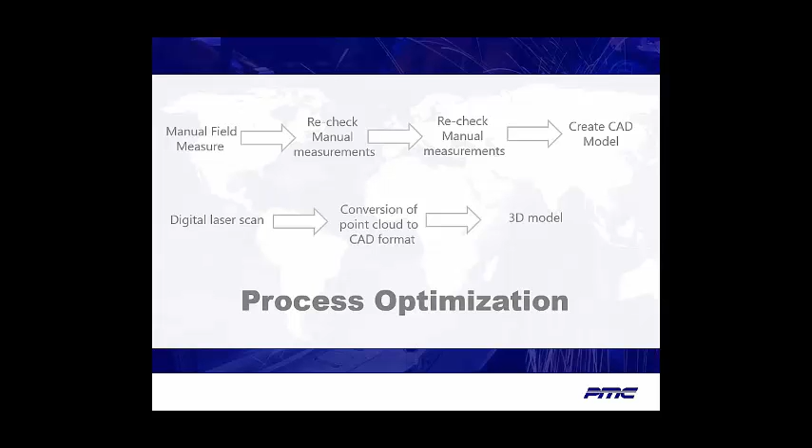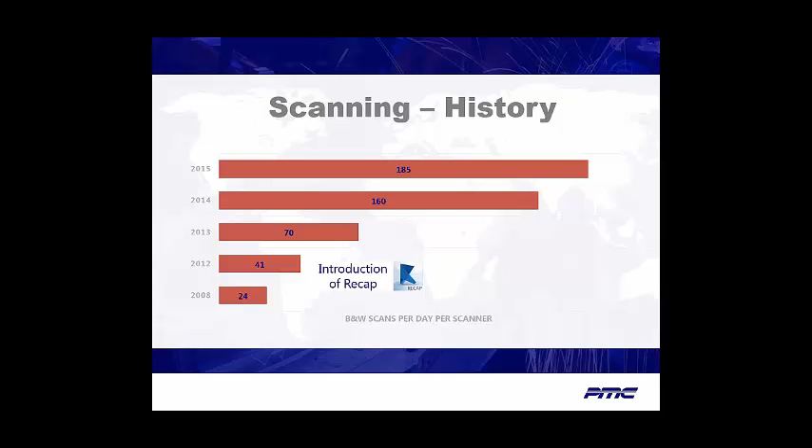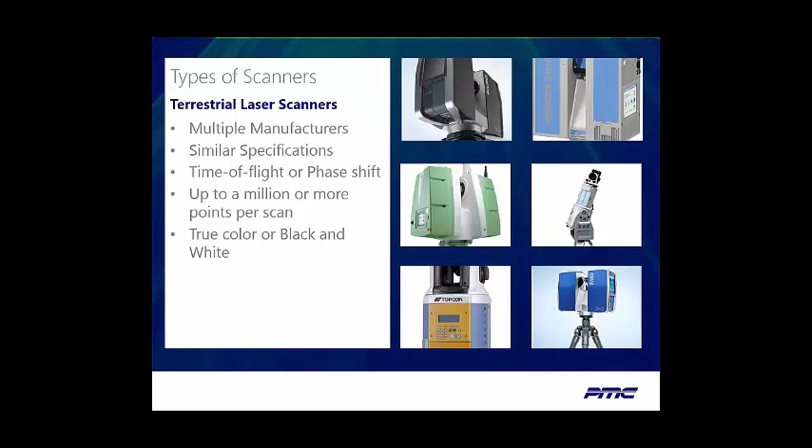Let's examine two common types of scanning used in architecture and construction projects. Terrestrial scanning is used to capture building size and spaces, both interior and exterior, anywhere from thousands of square feet to millions.

Part scanning equipment is required when a high level of detail information is required, usually for reverse engineering of specialty details. PMC has successfully integrated both part scanning and terrestrial scanning for a true vision of facilities where the capture of intricate details, such as tooling or architectural design elements, needs to be included with the facility as-built model.

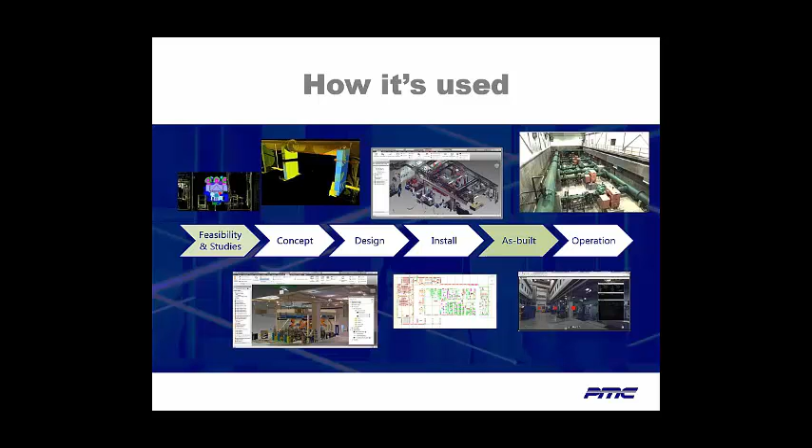Today, terrestrial scanning is used in all phases of project development, whether it's fast and accurate feasibility studies or ongoing facility maintenance and operations. The challenge is identifying at what stage of the process scanning can yield the highest return for you. PMC can help.

The success of a scanning project is dependent on meticulous project planning. The scope of the project is determined by the level of detail and specific areas to be captured. Ideally, scanning should take place when there is little or no activity in the facility.

This might require off-shift or weekend, overnight scheduling, and access to the facility must be coordinated. A fixed project timeline and costs are agreed to before any work begins.

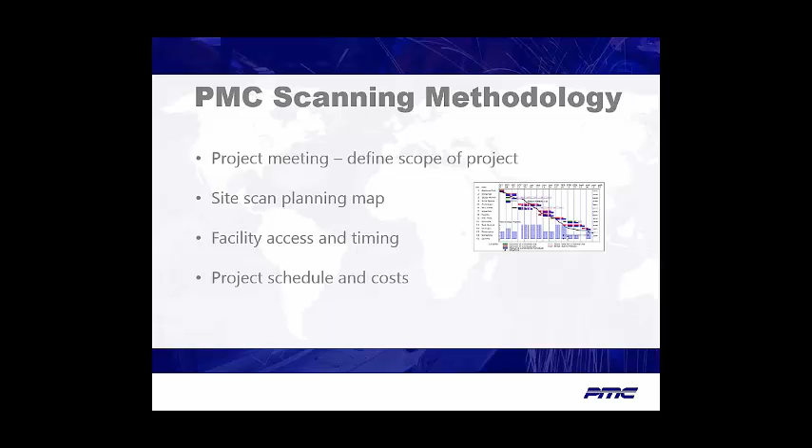Because of PMC's vast experience in scanning projects for over 15 years, we know the questions to ask from an AEC perspective. The details might include existing structural issues and if there are any safety considerations in accessing the work areas. Also, what will the client be modeling?

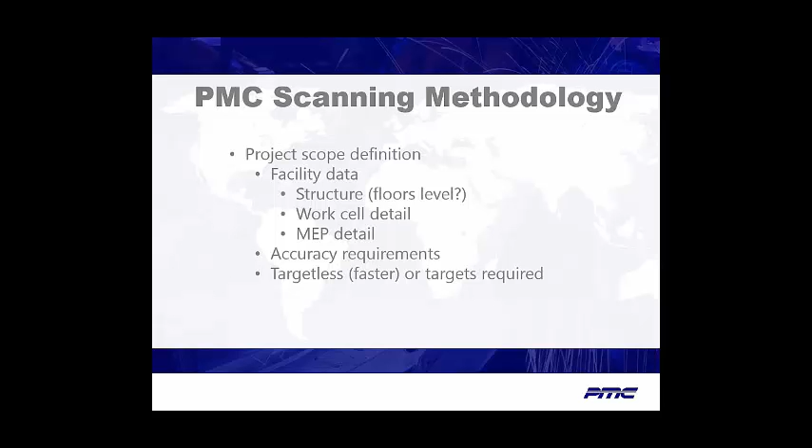For example, will there be a need to take time to capture all MEP detail, or are they only interested in the architectural floor plan? If the equipment and MEP will be removed during demolition, there's no need for the added scanning time and associated costs. This is the typical workflow for terrestrial scanning.

There are always various options based upon the desired outcomes. The basic process is creating a detailed map of scan locations, then field scanning according to that plan, processing of the scans to create a point cloud, and then hand off to the design team.

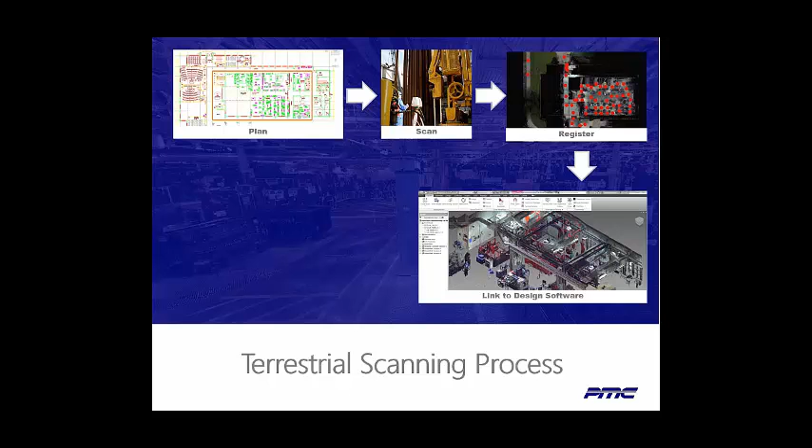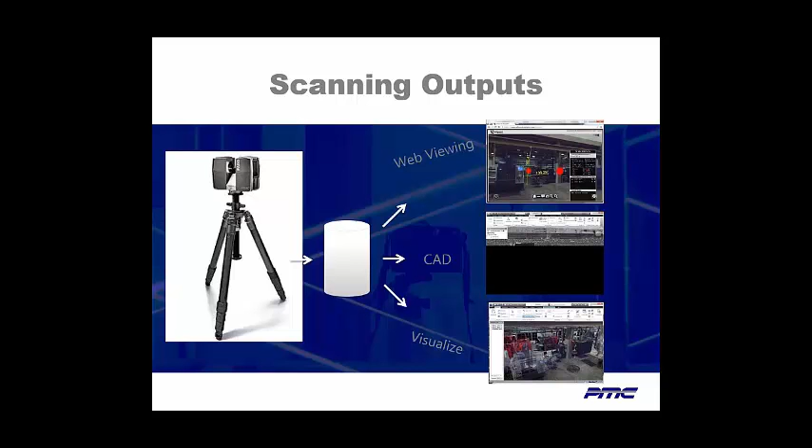Once the point cloud has been created, the data is now available in a number of outputs. Using tools such as Navisworks, the data can be incorporated into CAD software, viewed in the field on tablets, or used to visualize new design elements.

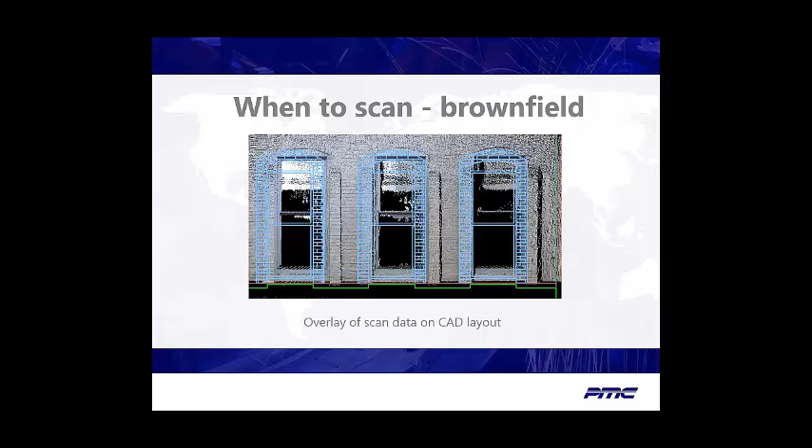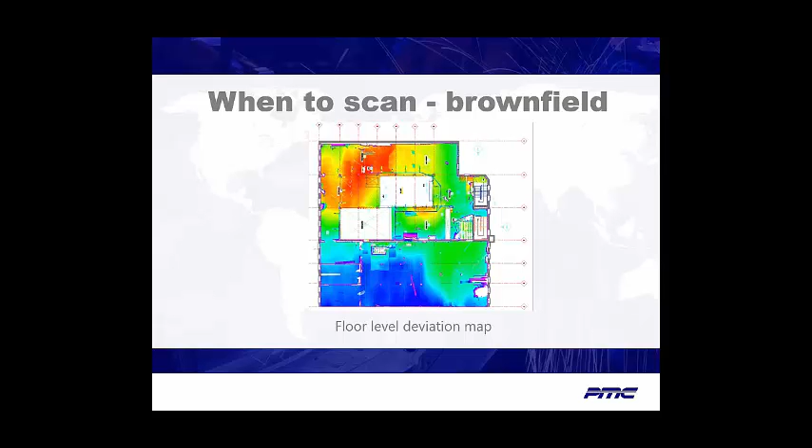Point cloud data can also be used as a design tool. This allows visualization of proposed changes directly on the point cloud data without modeling. Multiple design iterations can be evaluated quickly and economically.

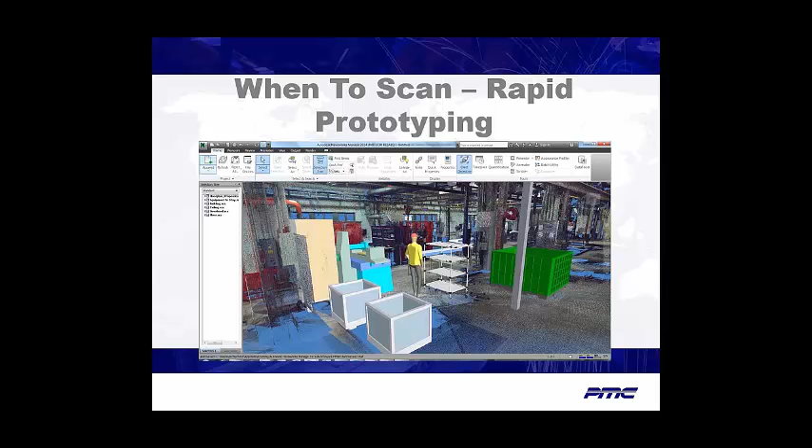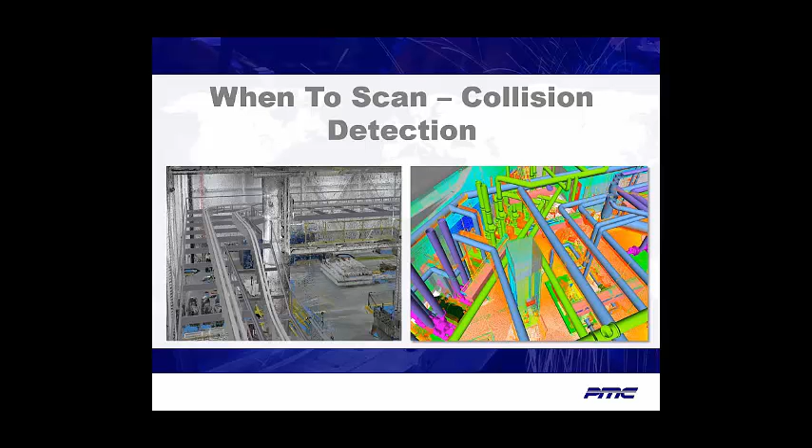Collision detection has always been an important use of point cloud data. Proposed designs can be overlaid on the point cloud and interferences are quickly identified. These clashes are not readily detected in 2 dimensions. This example is from a project PMC completed 15 years ago. The gray background is the scan, and the piping was the proposed configuration.

It is also possible to use the point cloud to create accurate demo drawings. Using CAD software, instructions for the demolition can be overlaid directly on the point cloud. This avoids time and expense required for creating demo documents.

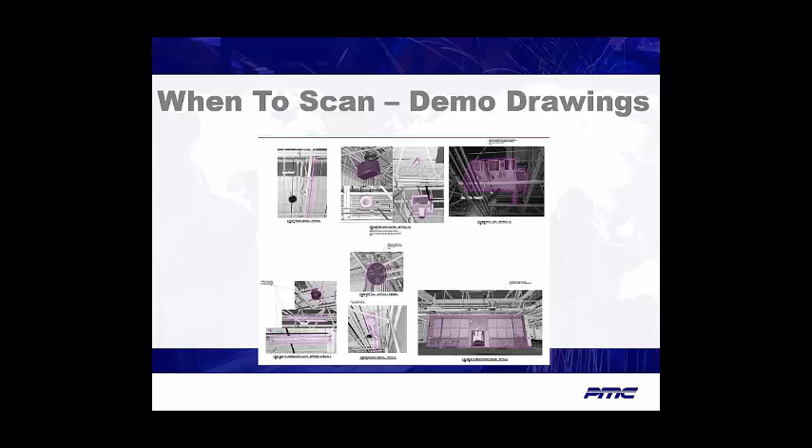For a build to the model or IPD structured project, validation of as-built conditions can be performed during construction. Before the floors are poured or the walls are enclosed, a scan can be completed, data overlaid on the model, and reviewed during a project review meeting. With proper planning, this can be done in the same day.

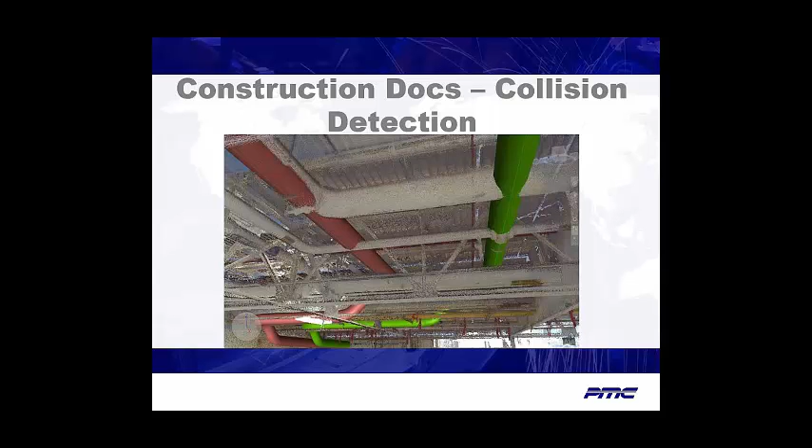For remote job sites, the review meeting can be held online, eliminating the need for everyone to travel. Additionally, the data files can be posted for additional reviews. Everyone will be working with the same data, and multiple trips to the job site can be eliminated.

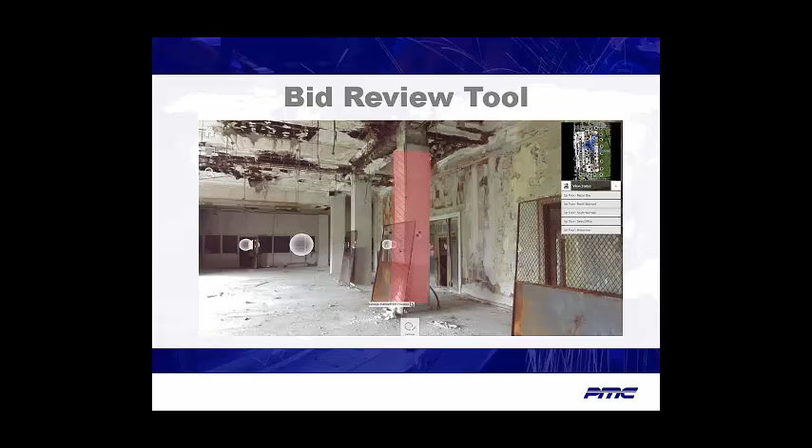PMC also has extensive capabilities in modeling, from conversions of existing 2D to 3D or creation of 3D models from scanned data. Our onshore-offshore delivery model using our wholly owned subsidiary in India can greatly reduce project costs.

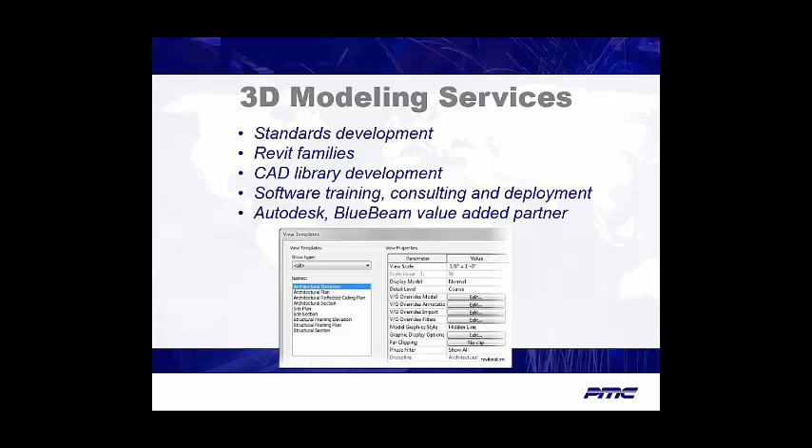Here is a case study that focuses on a project we completed on a building that was over 100 years old and no existing as-built drawings were available, and the field measurements were not accurate.

Architecture is dependent on photos of existing elements, but also requires relationships between elements. Photos can show existing conditions, but cannot determine exact relationships between the elements. During the scanning process, the digital scan is taken, and in the same position, an associated photo is taken to provide the ability to contrast and compare.

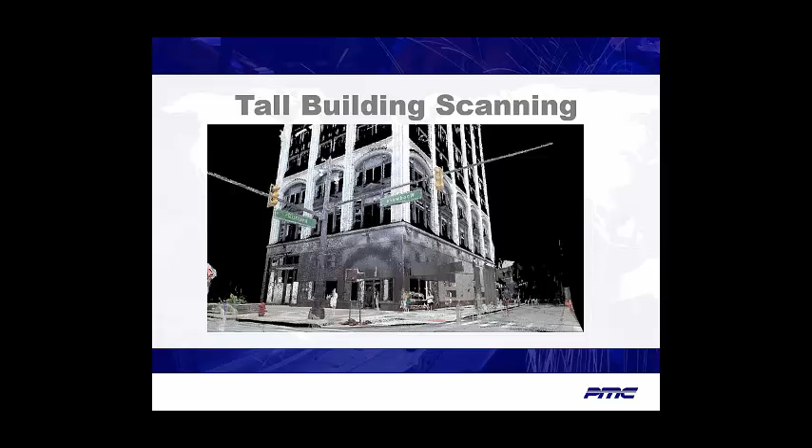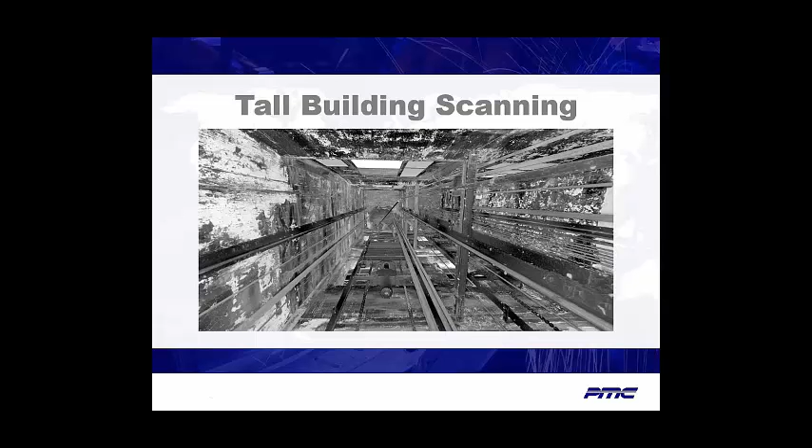Black and white scans can be done in these conditions. Note the conduits along the sides of the shaft. None of this was known by the project team, although the structural engineers needed to know the viability of the shaft.

Because the building had been abandoned, the access to roof areas was limited for safety reasons. Using a boom, we were able to capture the data without having to physically be on the roof.

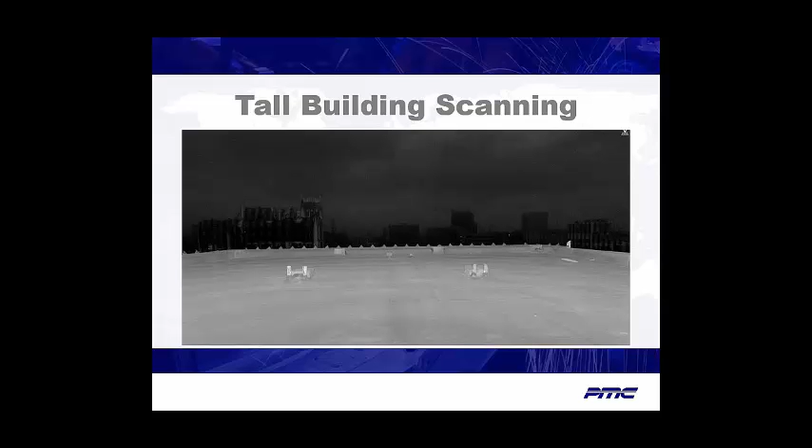Now let's examine some recent projects to give you an idea of timing and costs. The first is a manufacturing plant where the engineers had designed a new piping system in 2D, and the owner had some concerns about clearances and possible clashes with existing infrastructure.

We were able to quickly scan the scope area, convert 2D documents to a 3D model, and perform collision analysis all within a few days. This allowed us to efficiently identify several problem areas, allowing for adjustments to be made prior to construction, saving the owner considerable time and expense.

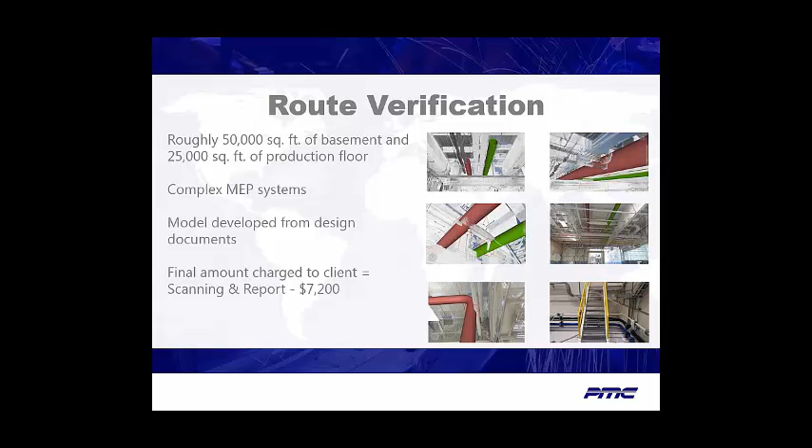PMC has a long history of scanning very large facilities and regularly performs projects that exceed 1 million square feet. These projects require a much higher level of planning and coordination, but can be equally successful to the smaller projects.

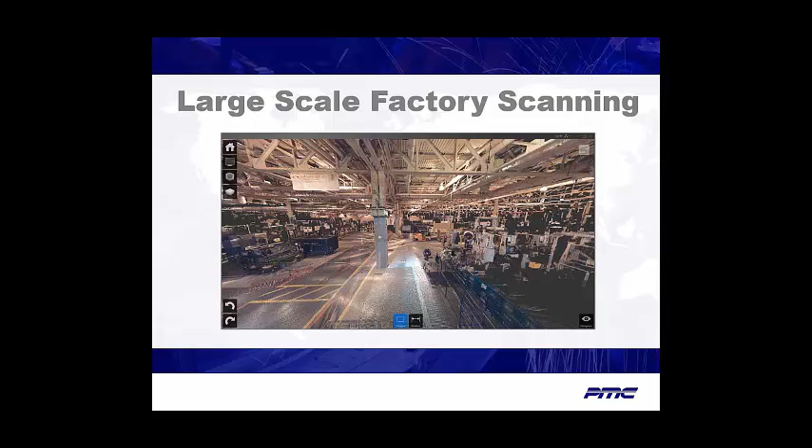In this project, we scanned over 1 million square feet in the week before the Christmas holiday, running multiple teams of scanners 24 hours per day. This allowed us to complete the field work during the plant shutdown.

This project is part of our work with the large manufacturing client to convert all of the factories to smart factories. The modeling portion of the project required a minimum of 16 designers for 10 weeks. With our global operations, we were able to work 24/7.

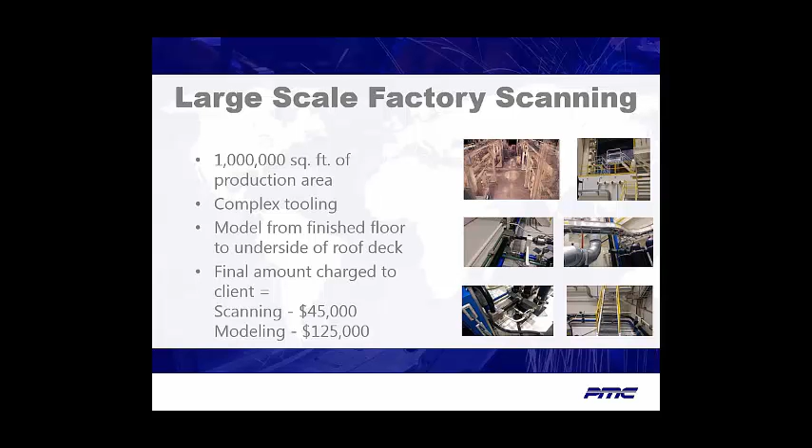With our breadth and depth of experience in the AEC sector, we have the ability to add value to a project of any size.